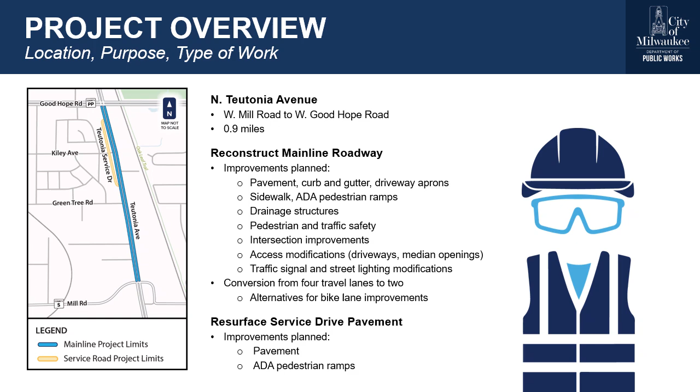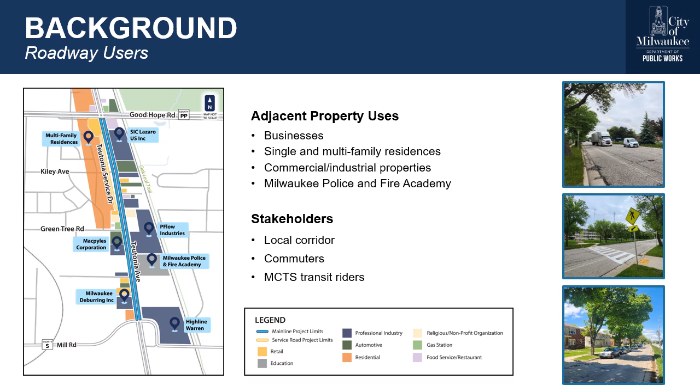To tailor the design to the needs of the stakeholders, we need as much input as possible on pedestrian safety needs, freight and delivery and loading and unloading needs, as well as parking.

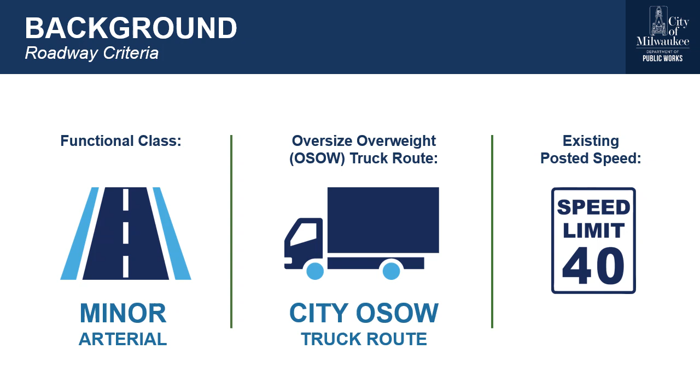In addition, Teutonia is designated as a City of Milwaukee oversized, overweight truck route where large loads are sometimes permitted. And the existing posted speed of the street is 40 miles an hour. We will take these into consideration with the design.

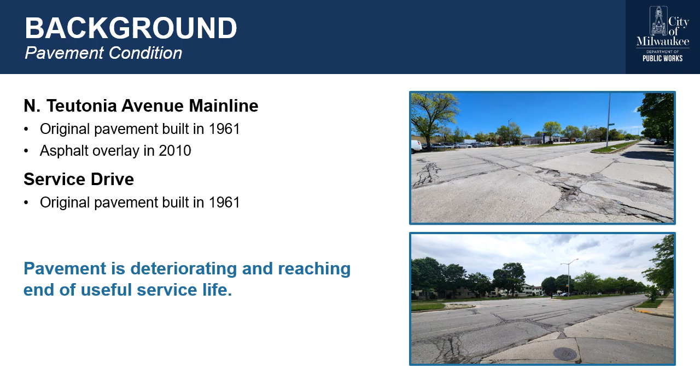As I mentioned, the project is being proposed due to the pavement condition on the street. The original concrete pavement for both the mainline roadway and the service drive was built in 1961. The mainline roadway also had an asphalt overlay placed in 2010. And the original pavement and the overlay are deteriorating and are reaching the end of their useful service life.

Getting into traffic information, we obtained traffic counts and did a speed study in January 2026. The current traffic volumes on Teutonia Avenue are around 11,000 to 14,000 vehicles per day. Growth is anticipated to be fairly flat, so the forecasted traffic is around 12,000 to 15,000 vehicles per day in the year 2049. We also collected speed data at 2 locations and found that speeds were high.

The posted speed is 40 miles an hour, and the 85th percentile speed was 54 to 57 miles an hour, which means that 85% of the people are traveling at or below 54 to 57 miles an hour. In other words, 15% are going more than 54 to 57 miles an hour.

Typically, we want the 85th percentile speed to be fairly close to the posted speed of 40 miles an hour. The data shows well over half of the people are driving over 45 miles an hour, and 10 to 22% of drivers are going more than 55 miles an hour. That shows some pretty substantial speeding in the corridor.

We also analyzed the corridor to see if it should still be a 4-lane roadway or if 2 lanes, 1 lane each direction, would be appropriate. Since we are looking to fully rebuild the roadway, we looked to see if it makes sense to keep or change the number of lanes, and we found that the roadway and intersections would operate acceptably under a 2-lane divided cross-section, so 1 lane in each direction. So even though the 4-lane cross-section would operate well, it would be considered overbuilt. Therefore, we feel a 2-lane street would be appropriate and would help to reduce speeding.

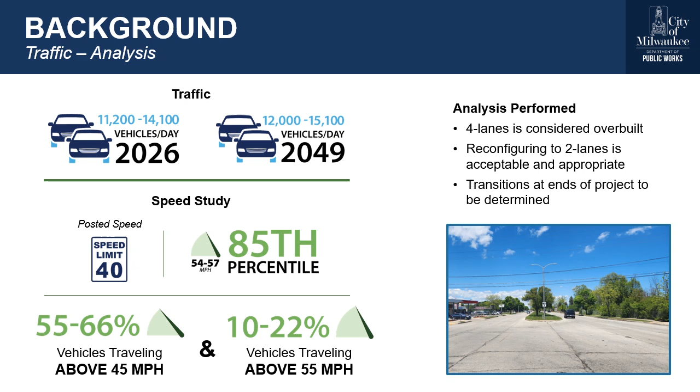We know there are larger vehicles such as transit and freight, and loading and unloading needs in the corridor, so we'll need input to help make the design compatible with the needs in the corridor.

We've also analyzed the crash data for the corridor, looking at 5 recent years of crash data. There were 60 crashes reported along Teutonia Avenue within the project limits over that time period, and that excludes the signalized intersection crashes, which would add another 118 crashes. We determined that the crash rate, or the number of crashes factoring in the amount of traffic, is about average for similar streets statewide. We also determined that the fatal and serious injury crash rate, which we call the KAB crash rate, is 68% higher than statewide average for similar roadways. That included a fatal crash near the Vera Avenue intersection which killed 1 pedestrian and injured another. So the analysis shows that there are some serious safety aspects to address on this street.

Based on that, we've identified some improvements which would help to address safety, such as roadway conversion to 2 lanes, 1 lane in each direction, and the traffic analysis supports that, and it would benefit safety as well. Other improvements include pedestrian improvements, which we'll touch on later in the presentation.

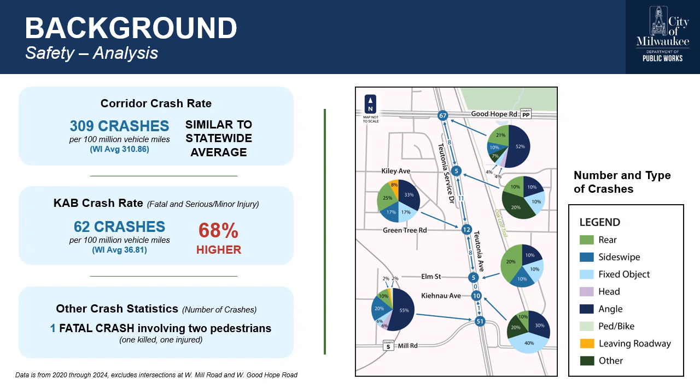As an example of safety improvements from converting from 4 lanes to 2 lanes, on South 60th Street, the crashes were reduced by over 20% compared to when it was 4 lanes.

The previous two slides about speed and safety are really important. The human body can only withstand so much force in a crash, and the faster motor vehicles are traveling, the greater chance that a crash will result in a serious injury or someone dying. With someone driving at 20 miles an hour, there's a 13% likelihood of a fatality or serious injury to a pedestrian. Driving at 30 miles an hour, that increases to 40%. And driving at 40 miles an hour, there's a 73% likelihood of a fatality or injury to a pedestrian. With the speeds we're seeing on Teutonia Avenue, which are even higher, that's a significant concern.

So one of the most effective strategies to improve safety is to reduce speeding. One of the ways to do that is through engineering with the redesign of the street, along with education and enforcement.

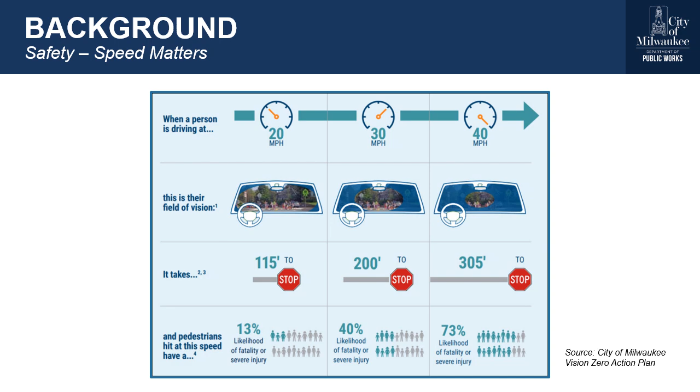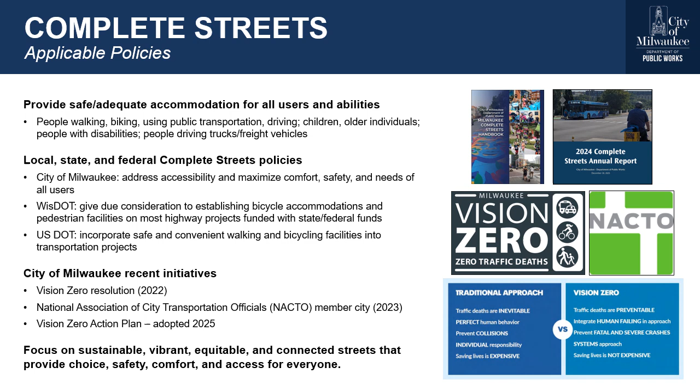So we've been developing alternatives and improvements with Complete Streets in mind. We need your input at this time to help us decide what is appropriate for this corridor. It's important to keep in mind that what works or doesn't work on one project may or may not work on another project. There can be different right-of-way widths, traffic volumes, bicycle and pedestrian needs, and other characteristics. There's no magic formula to decide which alternative to go with, so we'll be evaluating various alternatives and we'll need stakeholder input to help make a decision.

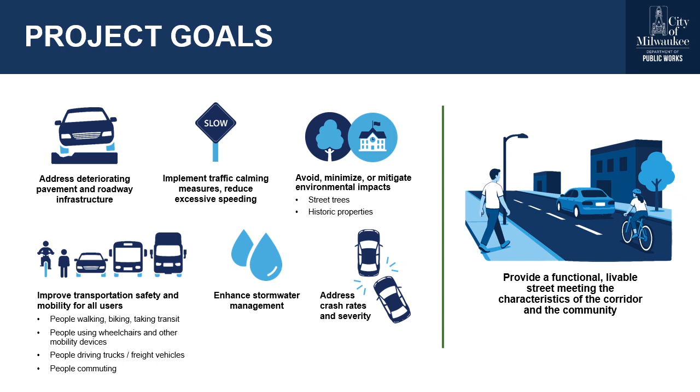All of the information on the previous few slides leads to our project goals. We've identified those on this slide, and they revolve around improving pavement and infrastructure, improving safety and mobility for all users, and enhancing stormwater management. To wrap it into one overall goal, it's to provide a functional, livable street meeting the characteristics of the corridor and the community. Next, Nick will cover the existing roadway configuration as well as design alternatives.

I'd like to touch base briefly on the current roadway section for this roughly 1-mile stretch of Teutonia Avenue. Currently, Teutonia is a 4-lane divided roadway with a center median, 2 travel lanes in each direction, an on-street bike lane and parking lane. Most areas have sidewalk with a grass terrace between the curb and the sidewalk.

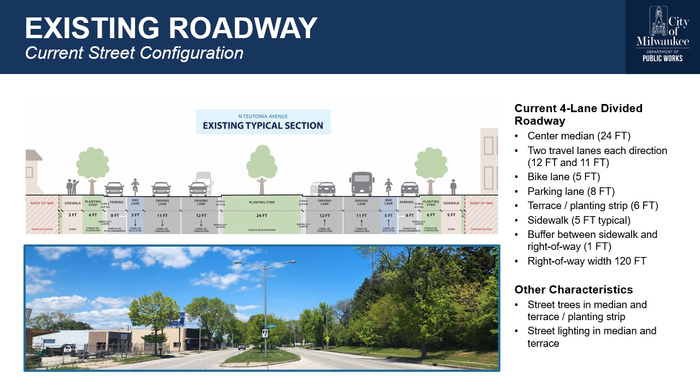Public street right-of-way is generally about 1 foot from the outer edge of sidewalk. There is both street lighting and street trees in the median and terrace areas of this corridor.

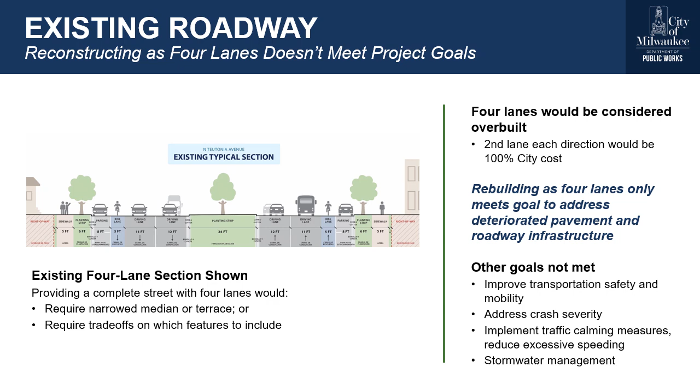We considered reconstructing the roadway as 4 lanes, but this would not meet the project goals and would be considered overbuilt, with the second lane in each direction at 100% city cost. Reconstructing as 4 lanes would only meet the goal to address deteriorating pavement and roadway infrastructure. Other goals not met would be improving transportation safety and mobility, crash severity, implementing traffic calming measures to reduce excessive speeding, and stormwater management.

Other options we looked at are roadway reconfiguration alternatives, which are very similar to each other. The main difference in the alternatives is how the bicycle accommodations are provided. The roadway would be rebuilt with 1 travel lane in each direction, which provides adequate capacity and improves safety for all users of the roadway.

The center median would be slightly modified and would still accommodate street trees and street lighting. Sidewalk would be replaced, including ADA pedestrian ramps. On-street parking would be provided at select locations. Street trees in the terrace area will generally remain. Drainage structures will be replaced or repaired.

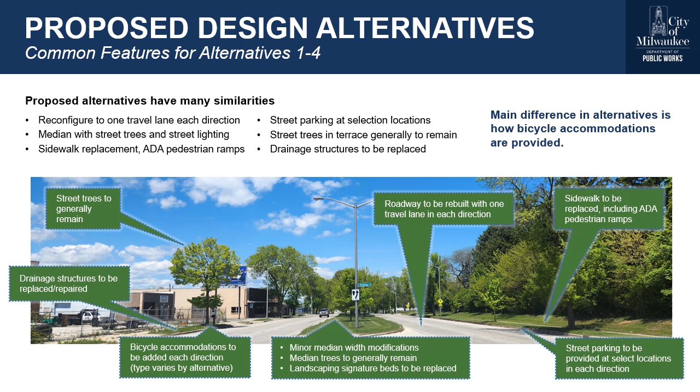With Teutonia being signed as a bike route, each of the alternatives will look to improve bicycle accommodations in conjunction with the roadway. We anticipate some driveway and access modifications. On the Teutonia Avenue website, there is a plot of the entire corridor showing potential driveway and median removals and modifications. With these modifications and lane reduction, it is critical that we get input on freight turns and loading needs from stakeholders. Staging considerations with each alternative are being considered and may result in a detour, one-way traffic, or two-way traffic during construction. The next few slides look at alternatives to provide improved bicycle accommodations.

Sample plots of each of the alternatives are on the North Teutonia Avenue website. These sample plots show a sample stretch near West Green Tree Avenue, and once the preferred alternative is selected, it will be developed for the whole project corridor and displayed at the next public meeting.

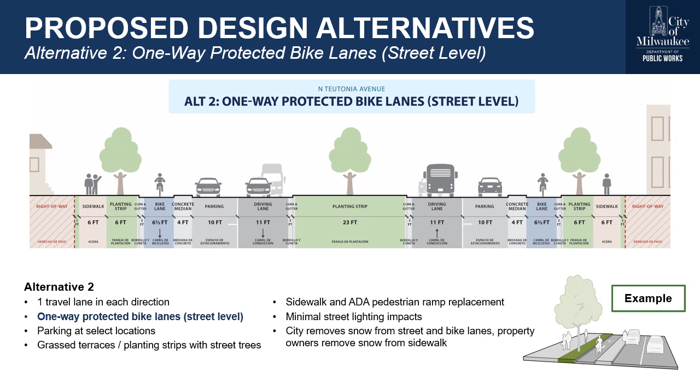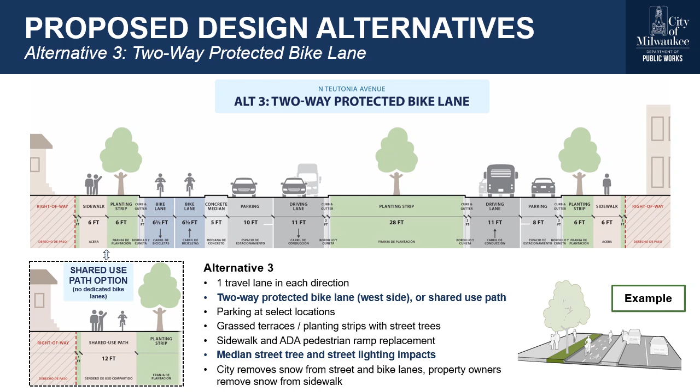Sample plots of each of the alternatives are on the North Teutonia Avenue website. These sample plots show a sample stretch near West Green Tree Avenue, and once the preferred alternative is selected, it will be developed for the whole project and displayed at the next public meeting.

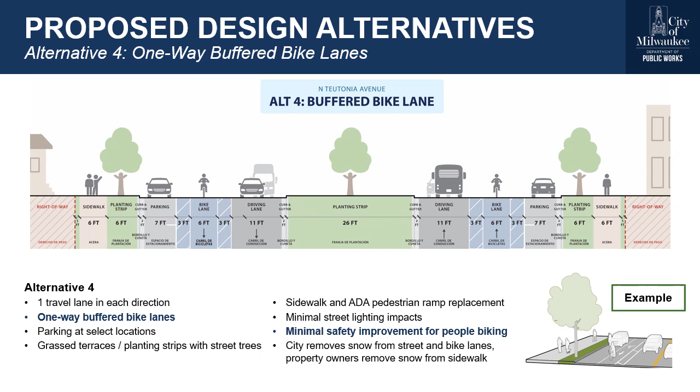The adjacent service drive to North Teutonia Avenue is planning on being resurfaced with construction. There will also be spot concrete pavement repairs along with spot sidewalk replacements. Some adjustments and repair to storm sewer structures may occur as well with this work.

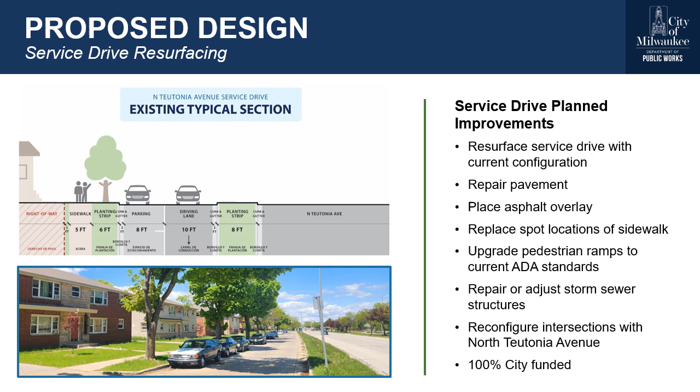Reconfiguration of the intersection with the service drive are planned. Pedestrian ramps will be updated to current ADA standards. There are some other improvements we'll also be looking at with the reconstruction of North Teutonia Avenue, including some possibility for raised crossings and bike crossings on the side streets. These can help safety for people walking and biking. Whether we include these may depend on the preferred alternative.

We'll look at crossing improvements at the Police and Fire Academy, such as realigning the crosswalk at its current location or possibly moving the location. We'll also look to include curb extensions and high visibility crosswalk markings, and similar pedestrian safety improvements at other locations as well. We'll also be looking at whether we can add green infrastructure, such as bioswales, to help infiltrate water.

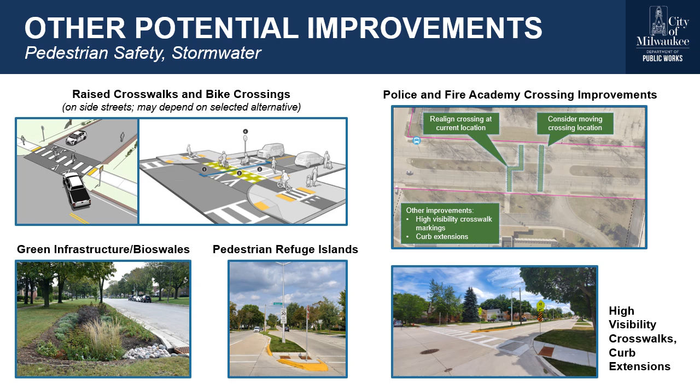Next, Brian will touch on project schedule and timeline. This slide shows where we are in the design process. We've gathered and analyzed traffic and crash data, survey and engineering data, and we've developed alternatives for a sample stretch of the roadway, as Nick showed.

After this public meeting, we'll take the input we receive and select a preferred alternative, and we'll show that at another public meeting later this year. We'll then develop an environmental document which documents the reasons for the project, the alternatives considered, the alternatives selected, the impacts, and the public input we received. After that is when we get into detailed engineering and plan development, and then utilities will be adjusted as needed prior to the full reconstruction of the street.

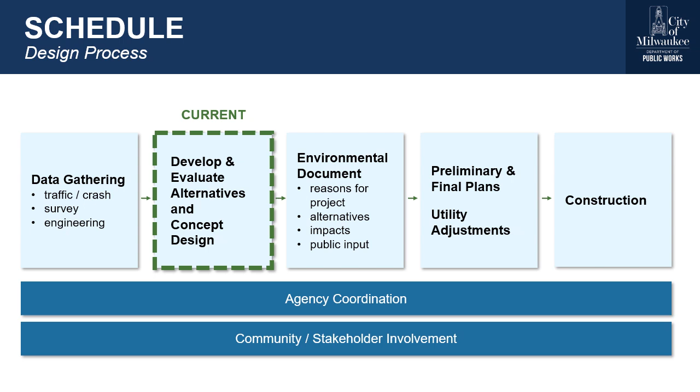Finally, after that comes the reconstruction. The schedule on this slide shows how the design process plays out over the next few years. Again, early stakeholder input is very important to help us decide which alternative to move forward with for the rest of the design process.

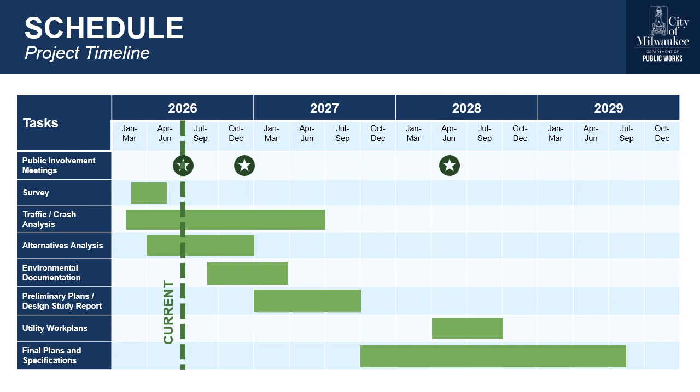Next, I'll cover a few general topics. For real estate, the project may need to acquire small areas of property or temporary easements. This would be at spot locations such as blending in lawns or reconfiguring driveways or intersections. We'll know more by the next meeting as we select and develop a preferred alternative.

Driveway permits will be needed with the project, and the city will send those out during preliminary design. Property owners will also be notified of any encroachments during preliminary design. These are objects such as fences or landscaping or similar features that are in the city's right-of-way.

Construction for the project is tentatively scheduled to occur in 2030, and it's anticipated to take 1 year. However, we need to keep in mind that most utility adjustments in the street will take place the year prior. There will be no assessments to property owners for project costs, and the project is funded through the Federal Surface Transportation Program, which is administered by Wisconsin DOT.

That means generally 80% federal funds and 20% city funds will be used for the mainline reconstruction and will need to follow city, state, and federal policies. The resurfacing of the service drive will be paid for 100% by the city. Last but not least, the cost of the project is estimated to be $10 to $15 million.

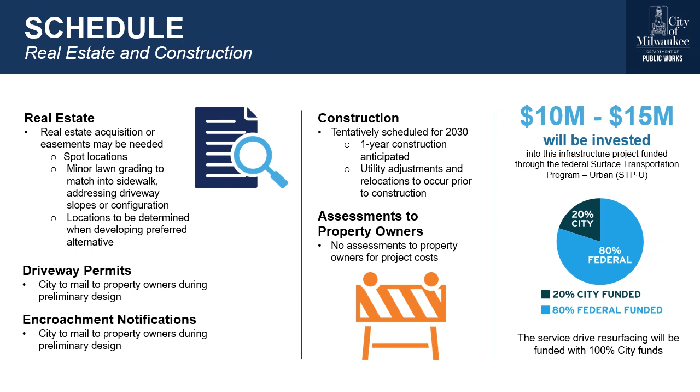This is a significant investment into the corridor, so we really need your input and engagement. We will be holding 3 public involvement meetings throughout the project. This first meeting is providing crash and traffic analysis, presenting feasible roadway alternatives, and gathering public input. The second meeting will present the preferred design alternative and gather more input to complete the environmental documentation and preliminary plans. Input on specific use of the corridor is super important at this first meeting and our second meeting before these environmental documents and preliminary plans are completed.

This includes input on pedestrian safety needs, trucking and freight operations, including loading and unloading, and general uses of the street. The third, which is the last meeting, will present pre-final plans, discuss construction staging, and gather input on potential concerns related to construction.

We will be utilizing the North Teutonia Avenue project website to share project information and materials. This website is accessible by scanning the QR code with your smart device or by visiting the link above. Updates and announcements will be posted to this website to keep you updated throughout the design process. We encourage you to go to the website and subscribe to our email distribution list and to help spread the word about the project and encourage others to be engaged.

If you have any comments or questions, please see the contact information on your screen for the public involvement lead. We look forward to your input and engagement, and thank you for watching the public involvement meeting. Thank you for your engagement throughout the North Teutonia Avenue project.